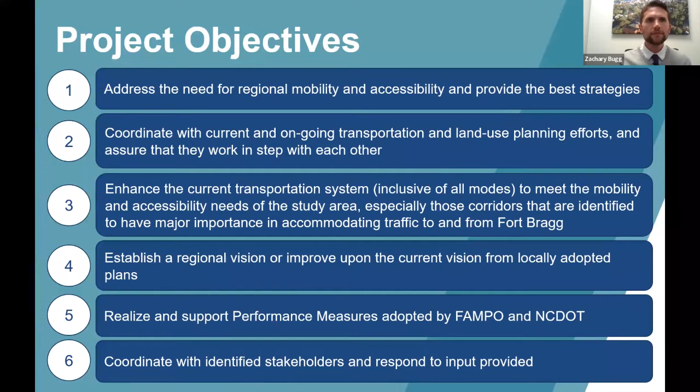So here's a brief snapshot of where we're at for the overall project schedule. As I mentioned, we got kicked off last spring. We held the first public meeting at the end of the summer. And the goal of that meeting was to essentially get input on what's the underlying conditions out there today, from an automobile congestion standpoint, traffic safety, multimodal connections, transit service. Really want to get a picture back when we last talked of what's not working today, where are the issues across the MPO, which is a 4-county area.

And we got feedback from you all. There was a survey, an online comment map. We held the public meeting, actually in a series of sessions, to be able to get that feedback. And I will quickly go through and recap what we heard. We had about 40 people in attendance of the virtual sessions, but many, many more were on the project listserv, the email lists, and were able to contribute to our underlying list of projects.

So as far as what was identified through that first round of public engagement, we identified those corridors, those roadways, and those streets within the MPO that were the most congested and most in need of safety improvements. And you'll see a lot of overlap here. If a corridor is having issues with safety, it tends to have issues with congestion. And if it's safety with one mode, then there tends to be a correlation where you have safety issues with multiple of those active transportation modes.

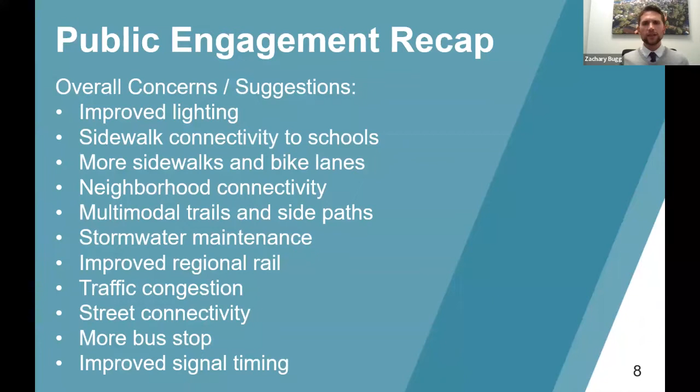Since that public meeting we held in September, that round of public engagement, the Kittelson team here has gone through and updated basically all of our existing conditions to go out to a design year. And for this case, we're looking at a project build year for 2050. And not all projects are going to take that long to get implemented and funded, but that's the horizon year that we're working with for this study.

We also performed a transit needs analysis, looking at not only where the existing service is, but also where's the best place to expand service, not only geographically, but also in terms of frequency and amenities. And then we developed a draft list of projects for improvement. We ended up clustering a lot of those locations with issues into identifiable projects for inclusion in the plan, and then worked through a toolbox of transportation improvements, looking at things like how to address congestion, safety, multimodal access. And really those last two bullet points are where we're really looking for your feedback before we finalize recommendations.

In terms of a future traffic assessment, we did a level of service analysis, looking at major intersections across the MPO. You'll see a lot of these maps have a lot of very detailed data in them, and they're presented in pairs. One is zoomed in to the city of Fayetteville to show some detail. The next map is zoomed out a bit to show the entire MPO area. The purpose of this assessment is really just to update from where we are today to 2050. And looking at growth and traffic volume and those conditions, what may be working today, but is projected to fail in the future.

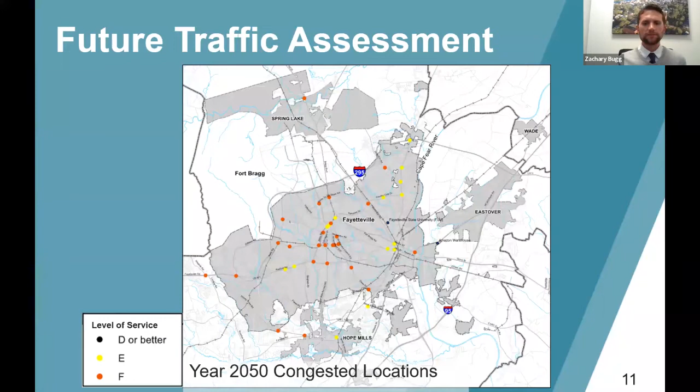Another major assessment that we did within the plan is what's called a transit needs or transit propensity assessment. And you'll see a map here that shows areas in red and yellow and orange, which are really those areas where we see a higher demand for transit service, whether it's population density, demographics, looking at things like zero car households, also major generators for transit service, such as hospitals, schools, major employers, parks, recreation, those types of things.

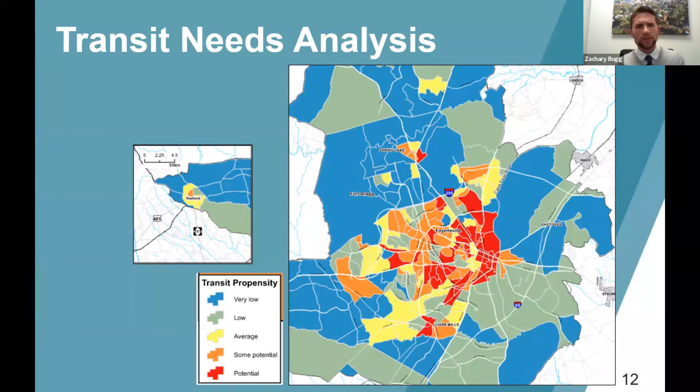And really what we found is, you can see there's the city of Fayetteville, which is served by FAST and already has a pretty extensive transit network, but also looking at how do you expand that within the city, and then also to some of the neighboring communities like Spring Lake, Raeford, Hope Mills. And we'll get into that later in the presentation, but just wanted to review the additional analysis that was done since the last time we talked.

Now, getting into the project recommendations, we really used a three-stage process to start with identifying, okay, where are all those deficiencies out there within the MPO? And there's a really long list. Once you start looking at all the places with high crash frequency, all of the different corridors that may have some congestion issues, all the different needs when it comes to transit service, at-grade rail crossings, and bicycle and pedestrian safety and access, you end up with hundreds of possible locations.

What we did was a tiered ranking of those different locations and looked at a variety of performance measures to get to a manageable list. And that's what we'll show you here today, about the top 20 or so for each one of these bullet points that you see here, the top 20 locations for improvement. Then we identified what's called a toolbox of different treatments to address each of those deficiencies. And that's where we're looking for your input before we get into project recommendations.

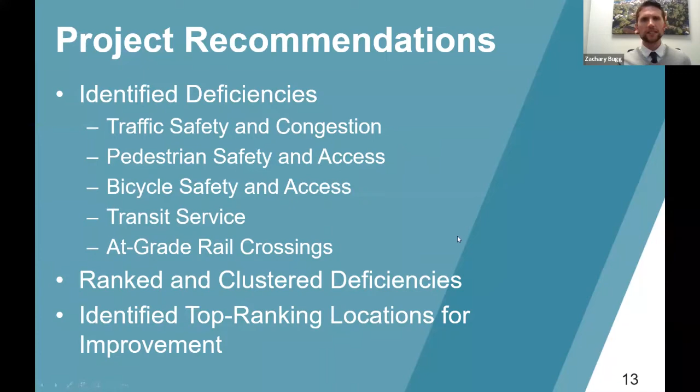So to recap that, we had, again, three different stages. We divided all of the different types of projects out there so that we don't have an unfair kind of apples to oranges comparison. So we kind of took everything and divided it into your traditional traffic safety and congestion projects and used the three-stage process that you see here to get to those recommendations.

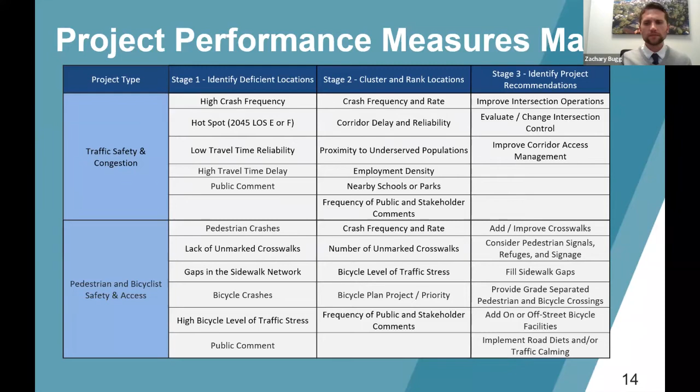You can see listed here in this matrix all the different metrics that we used to go in detail and rank these locations before we got into recommendations. Same thing goes for pedestrian and bicyclist safety and access, but obviously you're going to use different measures for those than you would for a traditional corridor safety and congestion improvement. Same thing goes for transit service and at-grade rail crossings. Those were also considered different types of projects. So we used a different methodology, but still stayed within that three-stage process.

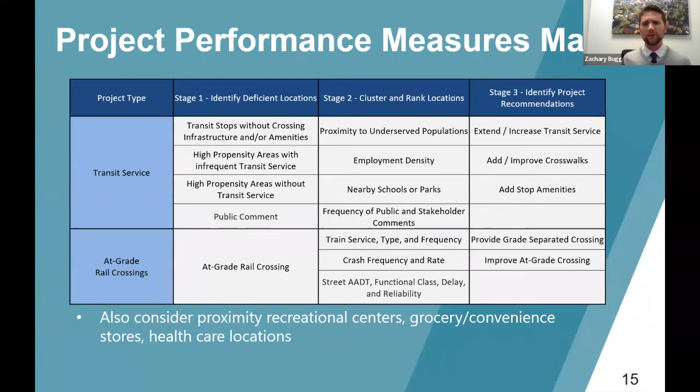We also, for all of these project types, wanted to consider areas that have been historically and even recently underserved, looking at places without healthcare, without access to grocery stores, convenience stores. And so that was an additional performance measure used to help rank these improvements in addition to everything else you see here.

So again, you'll see a lot of details with these. I'm not going to be able to walk you through every single location. I'm going to point to the project website. There's an online comment map there where you can go and see interactively what all these locations are and be able to comment and review those. So I'll hit the high points here, and we'll have a chance to take questions at the end. But hopefully this gives you a sense of what the team has been doing and what the plan will eventually look like.

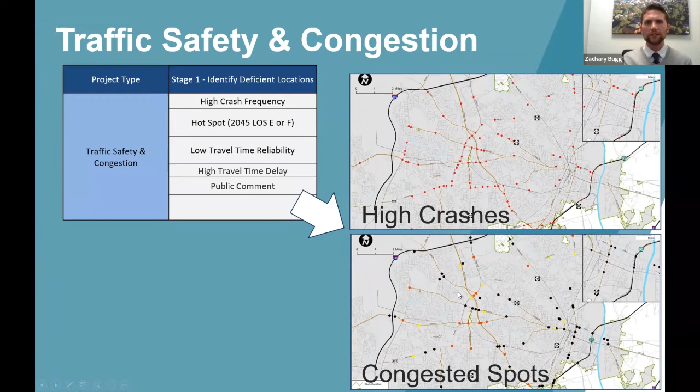So as far as traffic safety and congestion goes, we looked at things like high crash locations, and I showed the city here, but we looked at the whole MPO. Same thing goes for those level of service E or F spots along major corridors. We looked at things like corridor level travel time and delay, so that additional time you spend within the peak rush hour traveling along those corridors.

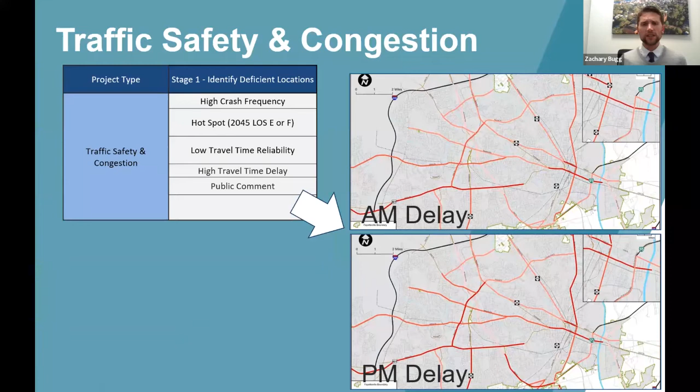We also looked at something called reliability, which is kind of day-to-day fluctuation. So you may have a crash one day and it takes 10, 20 minutes longer to get to your destination versus a typical day. So all those things went into our final list of projects for improvement. You can see them highlighted here. You have the same corridors that you all provided earlier on.

Just wanted to get a quick confirmation here. Can you all see the presentation? Yes. Okay. Yes. Good, thanks. Had a question about that pop up.

Going back to traffic safety and congestion, you see Skibo Road, Ramsey Street, Hope Mills Road, Main Street through Hope Mills, Owen Drive, Cliffdale Road, getting into the downtown part of Fayetteville and Person Street. Looking farther out, you've got Highway 87 in Spring Lake, and even going out Raeford Road towards Raeford, Fayetteville Road, and then the larger sections of Ramsey Street. So hopefully pretty typical for what's expected, but again, we're starting with a really big list of deficiencies and trying to get to the top 20 that we want to prioritize for improvement.

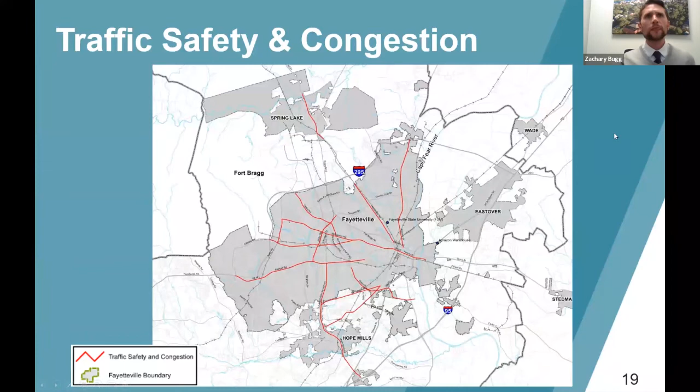That gets us into our toolbox, and I'll go through each project type here before I talk about the different types of recommendations, but we'll be reaching back out to you all later on this week. There'll be a survey posted to get your opinions and your thoughts on these types of improvements. But for each set of recommendations, we've got a toolbox of 5 or 6 different treatments to then go in and say, okay, for Skibo Road, we're going to recommend X, Y, and Z from our toolbox. And it could be 2 or 3 different things.

Looking at things like medians and access management to improve safety, but also to improve congestion. Looking at increased connectivity, where you take 2 cul-de-sacs and join them, creating that neighborhood connectivity. Looking at roundabouts and other intersection treatments that may be alternatives to what's out there today. You've got the traditional widening and turn lanes. You've got things like traffic signal retiming. These are big things. There are definitely smaller scale treatments that can be used, extending left turn lanes, using travel demand management. But really our goal before the plan wraps up later this summer is to take each of these treatments in the toolbox and apply them to each corridor, and consider that our recommendations.

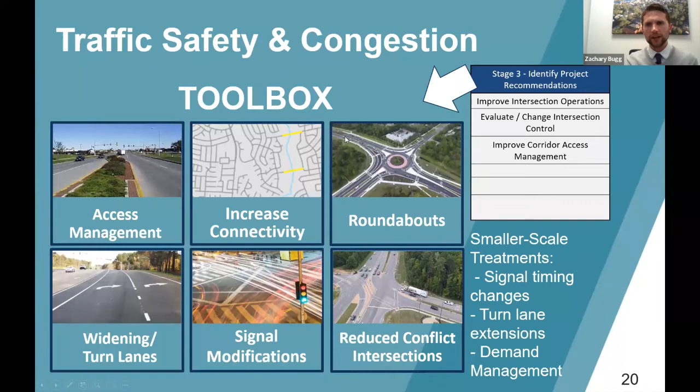Getting into pedestrian and cyclist safety and access, we looked at things like crash data. There's maps available to the public on NCDOT's website that can show you all of that. We've also posted them up in project maps. So looking at where those are most predominant.

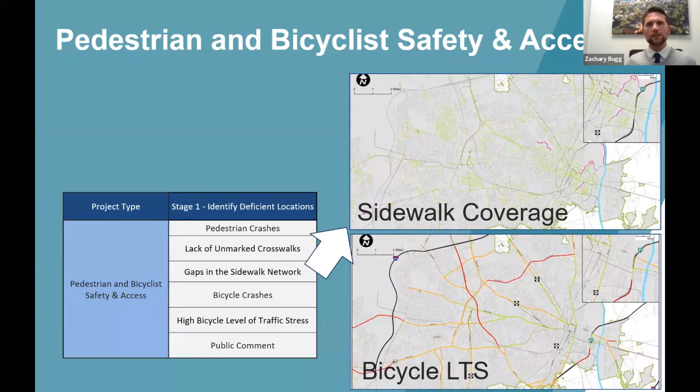Looking at sidewalk coverage and something called bicycle level of traffic stress, which is really what proportion of the cycling population would feel comfortable cycling on these corridors. And as you can see, for most of them, it's pretty low. So looking at ways to create a lower stress network.

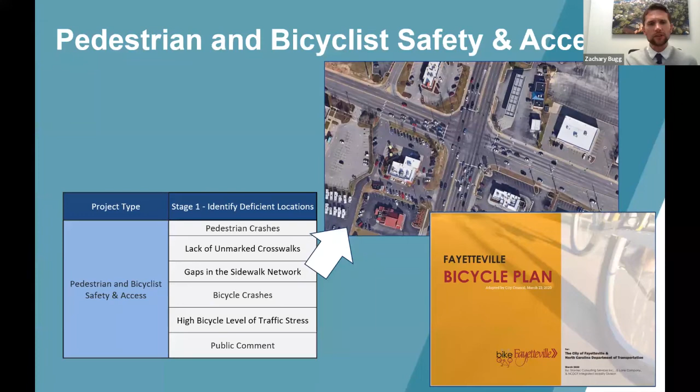Getting into looking at crosswalks. Here's an example of an intersection that doesn't have any marked crosswalks, but does have sidewalks everywhere. So even looking at the intersection level and saying, well, here's a major barrier to pedestrian access due to lack of marked crosswalks.

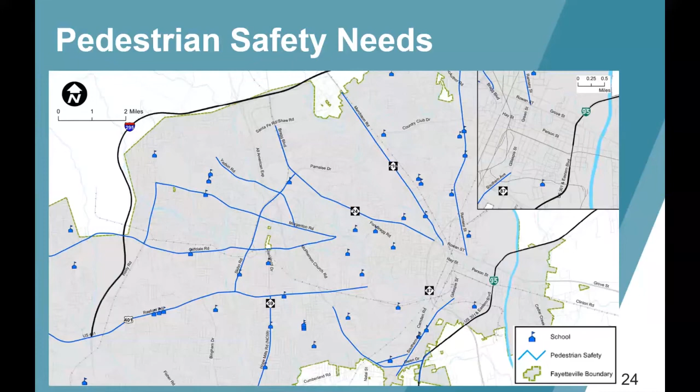Zach. Yes. There's some questions in the chat regarding how far back the crash data that you guys incorporated into the plan went, that sort of thing. Yeah, great question. I'll throw the crash data up here again, and please do keep the chats coming. I'm trying to monitor that as well, but if we don't cover them, we can cover them at the end.

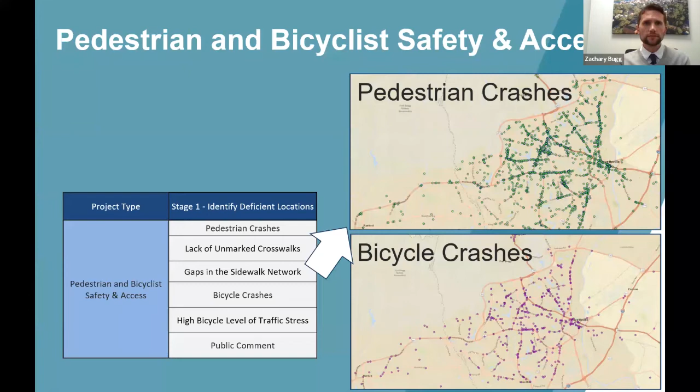The pedestrian and bicycle crash data that you see here was, I believe, a 10-year period, going back from 2011 or 2010 to 2019. So it's not completely current, but it was a 10-year span. The other crash data that we used was the latest 5 years of data. I did see a question about data and the sources for data. We will provide all of that in the final project report. So thank you for the questions.

Again, the pedestrian safety needs, even going out to some of the suburbs and the rural areas of town, looking at which corridors score the highest for increased sidewalks, increased crosswalks. You can see that here.

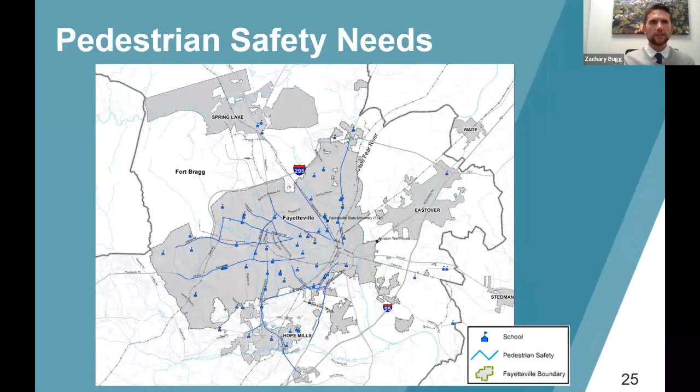For bicyclist safety, we again went through a list of the top 20 locations and also had some trails to incorporate, like the Cape Fear River Trail extension, looking at a few new corridors, with really the goal of providing connectivity in addition to safety. So it's a little bit different here, where we look at where's going to be a more popular or more comfortable route for cyclists to take, as opposed to some of the major corridors.

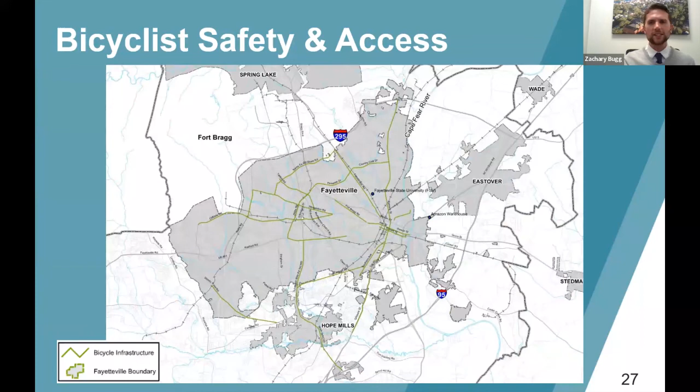So again, going into the MPO wide, looking at corridors like Southern Avenue, Eastern Boulevard, to really get the biggest bang for your buck, so to speak, when it comes to providing that additional cyclist connectivity. And here's the tools in our toolbox. Fortunately, there's a lot of those.

Looking at things like complete streets, so narrowing the roadway configuration and providing bike lanes, providing those median island refuges. There's separated bike lanes, separated multi-use paths. So there's a lot of different treatments out there, and the project team is going to be matching each to the most appropriate corridor when it comes to things like feasibility, right-of-way availability, even opportunities to reduce numbers of lanes for a couple of these corridors, and prioritize activities.

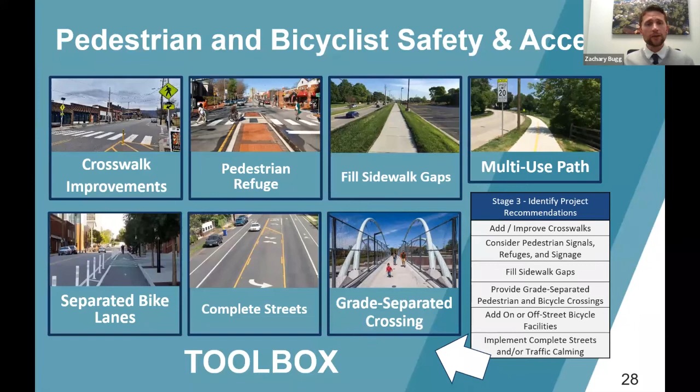So the next one up on the list here is transit service. Again, we looked at things like transit propensity, and you can see up in the right-hand corner the existing transit routes within FAST, the Fayetteville transit service network. Looking at what areas currently don't have transit service that might have a higher propensity, as well as which routes could use additional service and amenities.

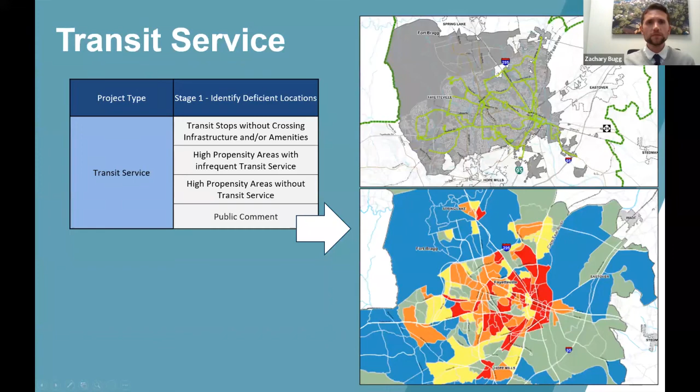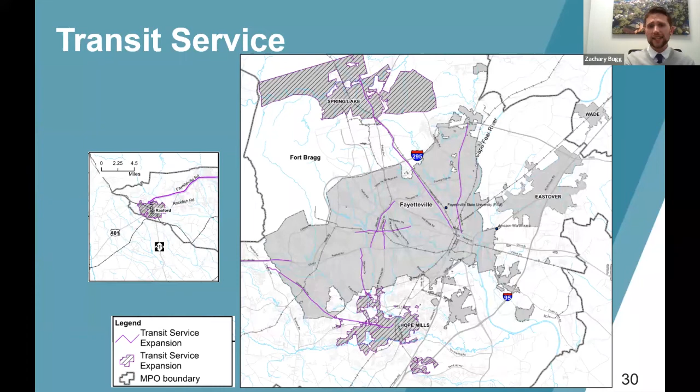And we found that obviously extension out to Spring Lake, Raeford, Hope Mills, those make the top of the list. But also looking at additional service and expansion into corridors like Raeford Road, Fayetteville Road, Ramsey Street, and then adding service to Cliffdale Road and Bingham Drive.

Not as many tools, although obviously a lot of effort and a lot of opportunities here. The distinguishing types of tools in our toolbox here are extending and increasing service, providing additional amenities, and that includes crosswalks. So the bus stop is connected often to a signalized or unsignalized crosswalk like you see here, and making sure that those amenities are there as well is something that we would be prioritizing.

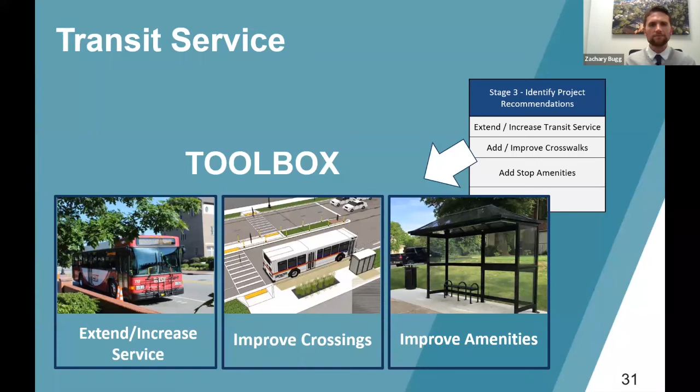The final type of project that we analyzed here is the at-grade rail crossings, and there are a lot of them around the MPO. There are a lot of them that are routinely blocked by different forms of rail, whether it's passenger or freight service. So we took a deep dive into every single at-grade rail crossing within the MPO to look at, okay, what's the frequency of the rail? How long is the train? When does the train come through, whether it's in the middle of the night or potentially closer to peak hours of travel. And we identified which ones are really ranked the highest in terms of looking to address the issues, whether it's a grade separation or something else.

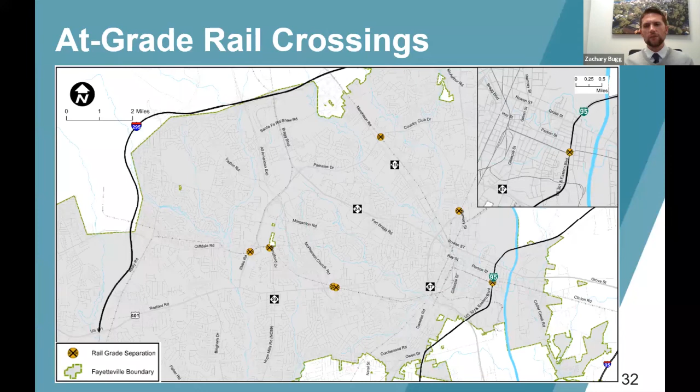So the ones we found here and shown on the map are the CSX line over Country Club Drive, over Eastern Boulevard, and then the shorter lines over Skibo Road, Lunsford Drive, and McPherson Church. So those are just a few. There's obviously many more within the MPO, but these are the ones that ranked the highest.

Looking at improving the at-grade crossings in areas where it may not be feasible to bridge the rail over or the street over. And then there's some more, I would say, impactful and maybe extreme tools like closing crossings and relocating rail. That is not something that we got into in terms of mapping out these locations, but it's definitely something that we can explore and that we're going to explore in the final plan and offer that up as a solution.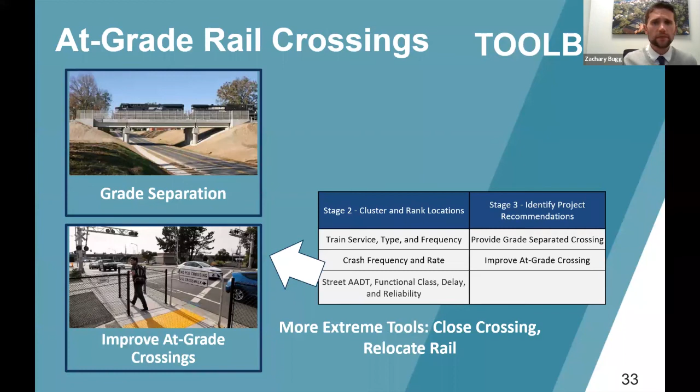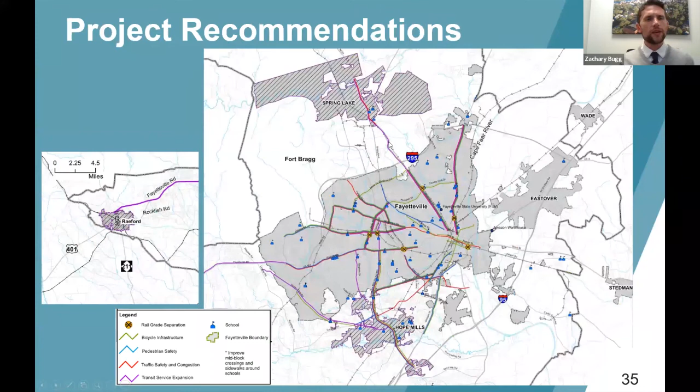So with that said, I'll go into the final map, and you see on this map, every single type of project is included. The other maps that I showed have each project type broken out separately to make it a little bit easier to follow along. I'll add that every map is available up on the website, and there's also the interactive comment map, where you can click the different types of improvements to help explore through these. You see, we have pretty broad coverage across the MPO, and I'll also note that there are several corridors that have project types in multiple areas. So we could be recommending an improvement that addresses multiple needs, such as multimodal safety and traffic congestion. There are definitely tools in the toolbox that do all of the above.

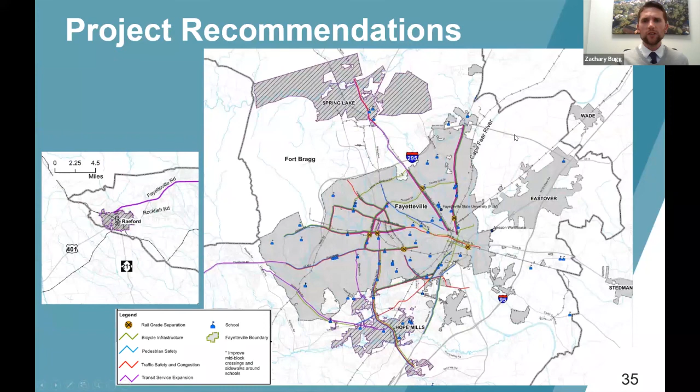So I will move on and talk next steps. And this is where, again, we're looking for input from you all. Please go to the project website. It's congestionplan.com, so really easy to remember. There's a link. If you go to, and I'll bring it up here in a second, the virtual public meeting #2 link on there, all of the information that is shared here will be displayed there. We'll post the recording of the presentation, as well as the maps are up there already. We'll be providing a survey for the public to get your input on these different tools, and really looking for your additional comments and questions on those.

And once we get all of that, working over the next month or so to compile that, we'll then refine the project recommendations. We're going to be preparing a cut sheet for each corridor to really provide a profile and list of those projects. Then that is going to go into the plan. It's going to go back to the MPO to put into their final list of projects for scoring and implementation through NCDOT funding. And then that leads into the next round of statewide prioritization and then the eventual funding of those projects. Our draft report is going to be completed in June, and that will also be posted up on the MPO's website and on the project website for as long as it's active, but then eventually to the MPO's website.